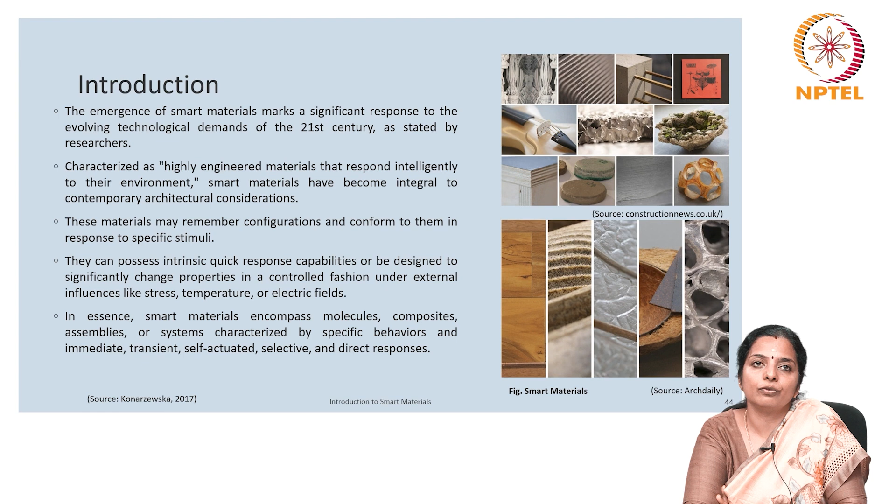In essence, smart materials encompass a diverse range of entities, including molecules, composites, assemblies, or systems, all characterized by specific behavior. These behaviors include immediate, transient, self-actuated, selective, and direct responses, making smart materials a versatile and dynamic class of materials.

Let us look at the characteristics of smart materials. Smart materials, in contrast to common architectural materials, exhibit distinct characteristics that set them apart. One key feature is their real-time responsiveness, enabling them to adapt dynamically to changing conditions. Unlike conventional materials, smart materials can react to multiple environmental states, showcasing their versatility. Importantly, intelligence is embedded within the material itself, allowing it to autonomously respond to stimuli.

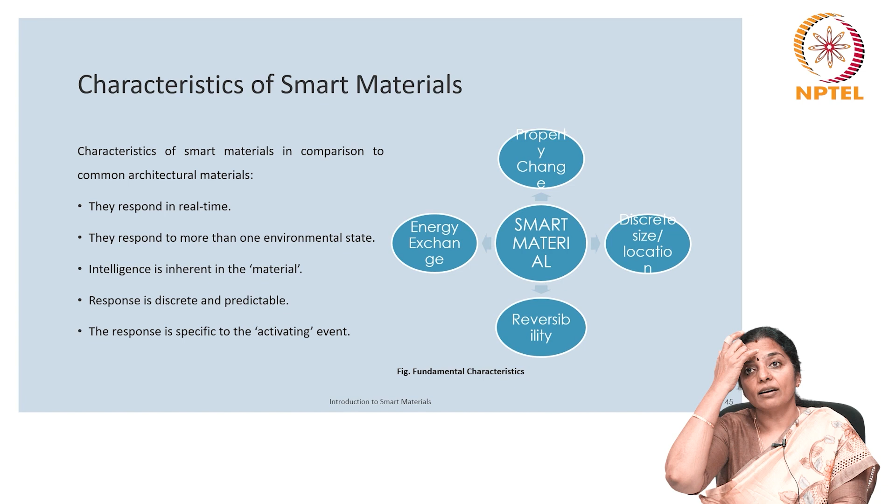The response of smart materials is both discrete and predictable, providing a controlled and reliable outcome. The specificity extends to the activating event, ensuring that the material's reaction is directly tied to the stimulus it receives. The fundamental characteristics that distinguish smart materials in architecture include their capability for property change, facilitating adaptability. They also possess the ability for energy exchange, contributing to their interactive nature.

Moreover, smart materials exhibit discrete size and location in their responses, allowing for targeted effects. Reversibility is another crucial trait, ensuring that the material can return to its original state after undergoing a change. These unique characteristics offer the potential for optimizing behavior to maintain steady state conditions in the environment, making smart materials valuable assets in architecture application.

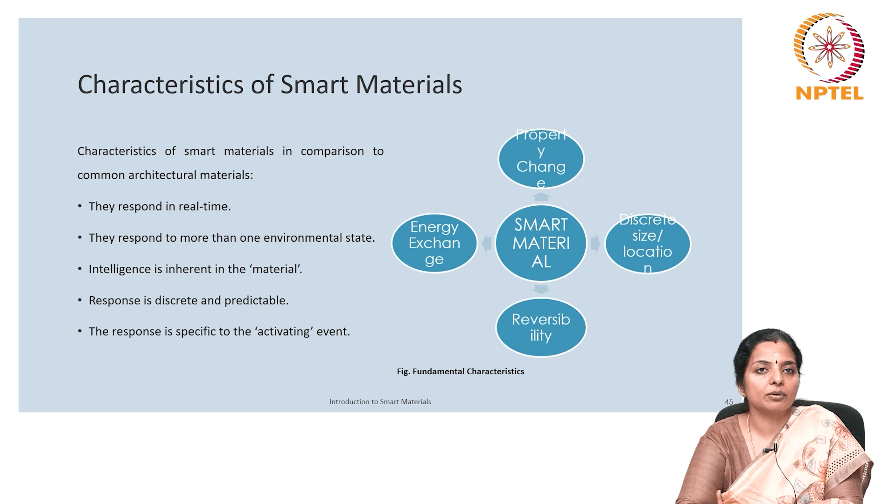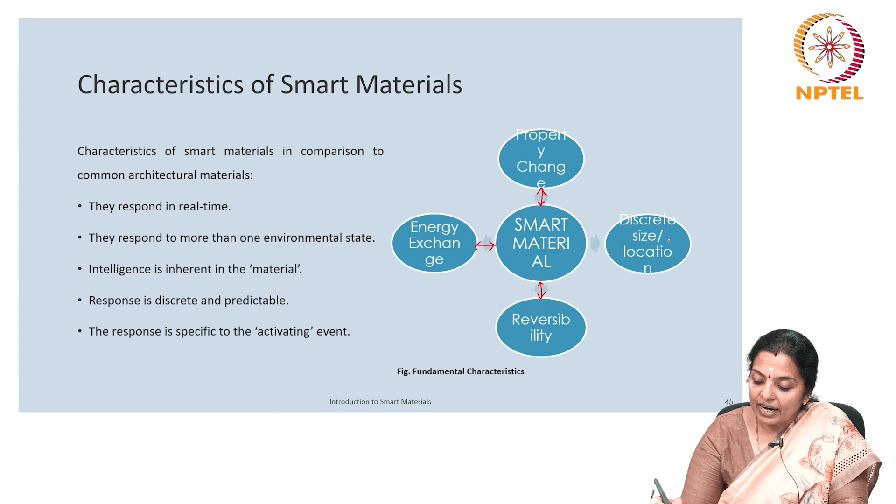In a gist, the characteristics of smart materials are that they respond in real time, they respond in more than one environmental state, their intelligence is inherent in the material, their response is discrete and predictable, and their response is specific to the activating event. Also, smart materials show reversibility, they show energy exchange, they undergo property change, and they have discrete size and location.

Let us look at the broad classification of smart materials. Now, smart materials are divided into two types, according to their behavior of energy stimulus from the surrounding environment. The first type comprises materials that have the capability to change their chemical, mechanical, electrical, magnetic or thermal properties, including thermochromic, phototropic, shape changing, mechanochromic, chemochromic, electrochromic, phase changing materials, and adhesion changing materials.

Now, the energy input to a material affects the internal energy of the material by altering the material's microstructure, and the input results in the property change of the material. Now, this type of material reacts through change in color and temperature.

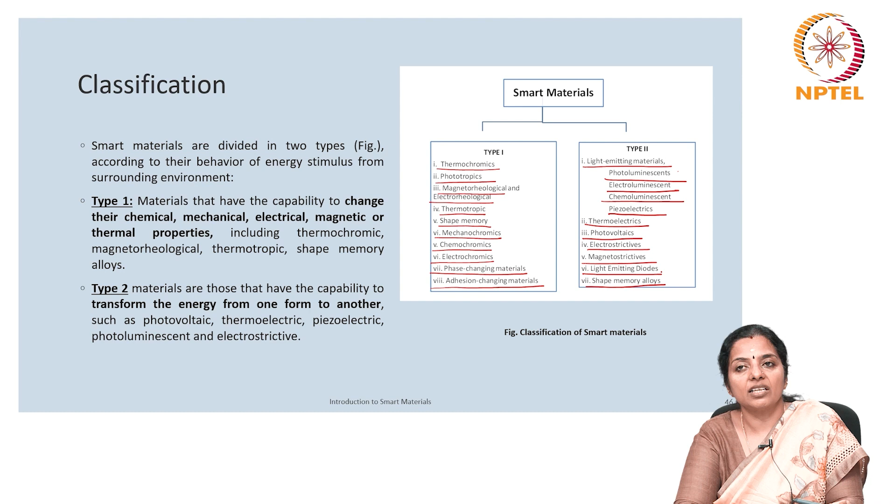The energy input to a material changes the energy state of the material composition but does not alter the material. While the state of the material remains the same, the internal energy undergoes a change. Some examples we have already seen. There are one or two which are common to both the types.

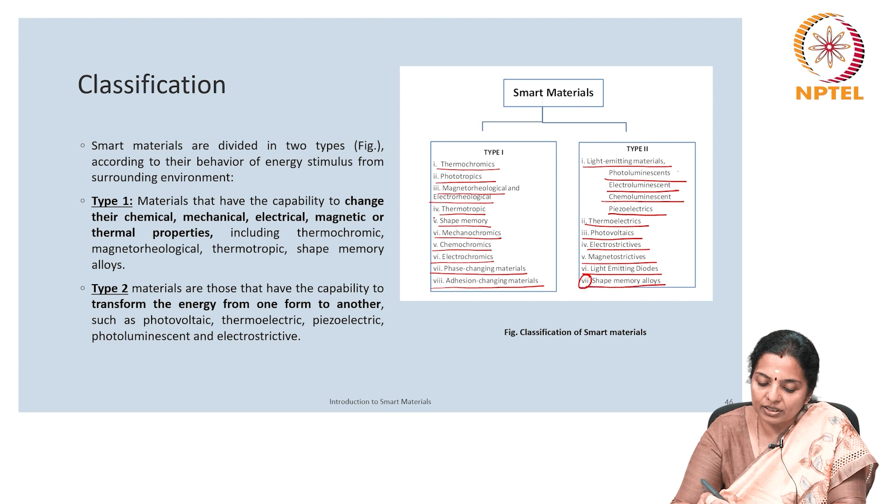Let us broadly look at the shape-changing smart materials. Shape-changing materials represent a remarkable class of substances that undergo reversible transformations in response to external stimuli encompassing light, pressure, heat, electricity, or magnetism. The alteration in their form is intricately linked to the distribution and arrangement of sensitive components within the material, ultimately resulting in changes in dimensions.

Ritter's classification system categorizes shape-changing smart materials into 6 distinct types, each responsive to specific stimuli. These are photostrictive, thermostrictive, piezoelectric, electroactive, magnetostrictive, and chemostrictive. Furthermore, subcategories within shape-changing materials are identified based on the specific alterations they exhibit, ranging from bending, striating, twisting and untwisting to constricting, loosening, swelling or shrinking.

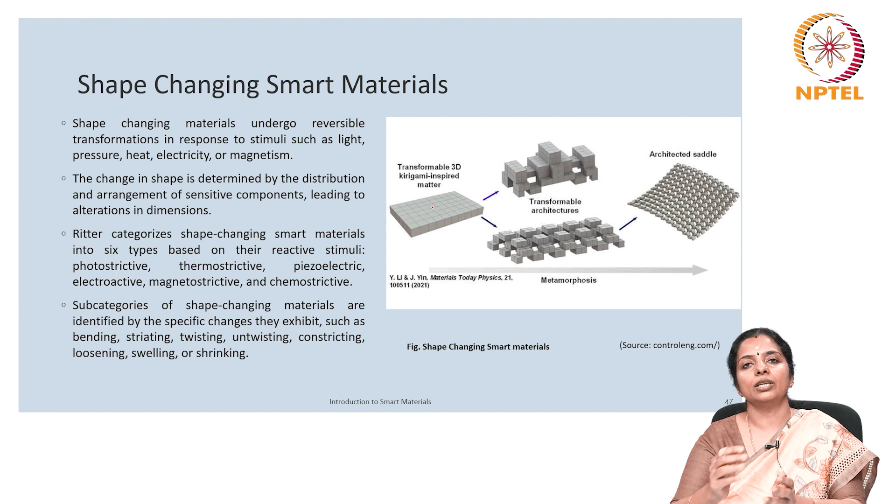This classification system not only facilitates a comprehensive understanding of the diverse behavior of shape-changing materials, but also provides a structural framework for their exploration and application across various fields.

Next, let's look at the energy generating smart material. Energy generating smart materials represent a remarkable advancement in the field of material science. These materials possess the capability to generate diverse forms of energy, usually achieved through the conversion of one energy type to another, culminating in the production of electric energy. The systematic examination of these materials employs two categories distinguishing them based on their inputs and outputs: energy exchange and electricity generation. The materials under scrutiny are intricate compositions combining various elements to fulfill specific functions.

These amalgamated materials can be likened to simple devices meticulously designed and structured based on their conceptualization and intended applications. This innovative approach to energy generation holds promise for more efficient and sustainable energy solutions, marking a significant stride in the realm of smart materials and their diverse applications.

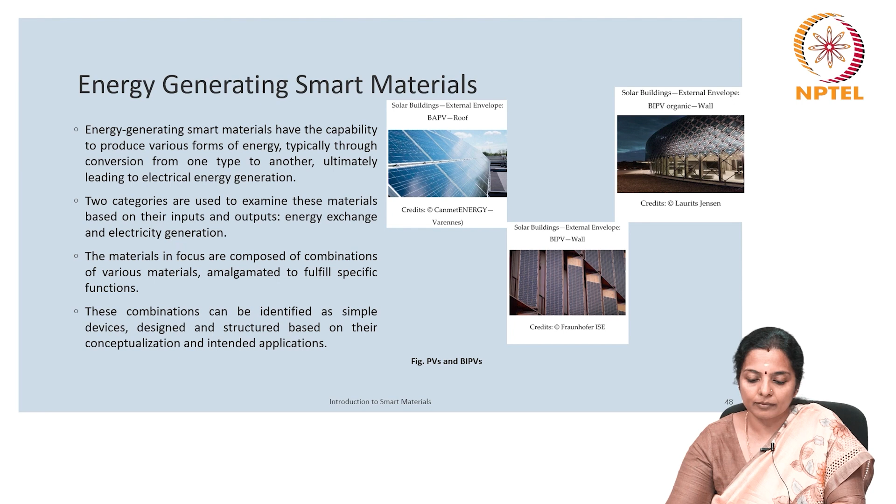Now, let us look at self-maintaining smart materials. Material science is a multifaceted domain that delves into both the exploration of smart materials and the experimentation with cutting edge technologies to augment the properties of existing materials. A notable recent development in this field is the advent of self healing technology, marking a substantial advancement. Unlike conventional material science approaches, certain emerging technologies within the realm focus on material research to fabricate entirely new materials endowed with distinct properties.

This approach diverges from naturally occurring smart materials that exhibit characteristics like self-maintenance. The property of self-healing inherent in smart materials is further amplified through these novel technologies, representing a significant stride toward more resilient and adaptable materials with enhanced capabilities in self-repair.

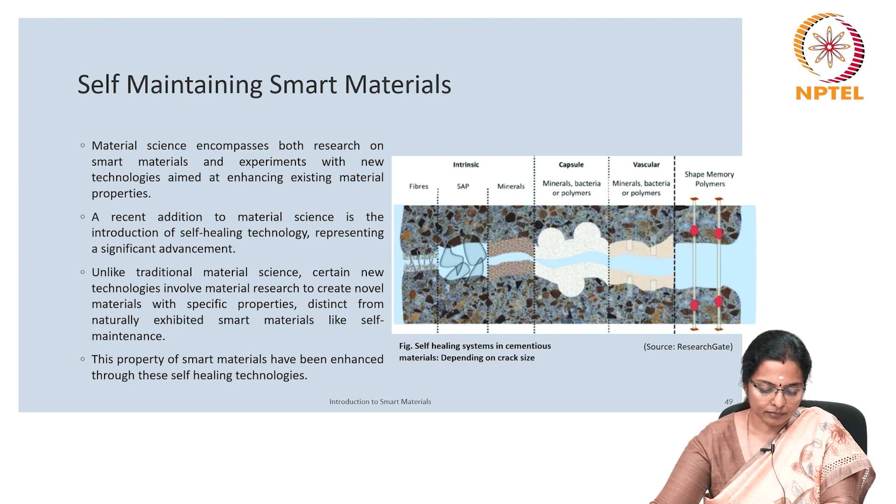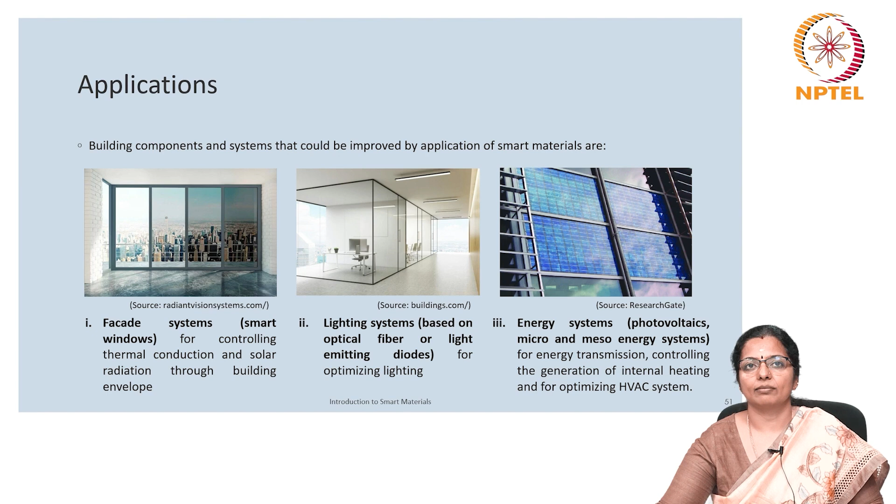Let us now look at the advantages of smart materials. Smart materials and their production processes have the potential to bring significant benefits to the construction industry. These materials offer improved strength, toughness, and ductility, making structures more robust. They also contribute to extended durability, reducing the need for frequent repairs or replacements. Smart materials are resistant to wear, corrosion, chemicals, and fatigue, ensuring a longer lifespan for constructed elements.

Importantly, they bring about cost savings not only during construction but also over the entire life of a structure. Additionally, these materials enhance a building's ability to withstand extreme events like natural disasters and fires, providing increased safety. Their manufacturing and application are straightforward, making the construction process more efficient. Smart materials also consider aesthetics and environmental compatibility, ensuring structures are both functional and visually pleasing.

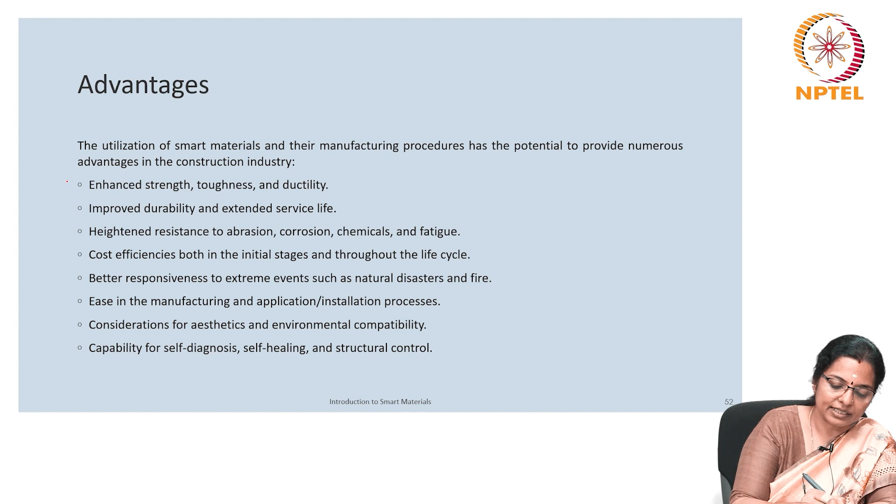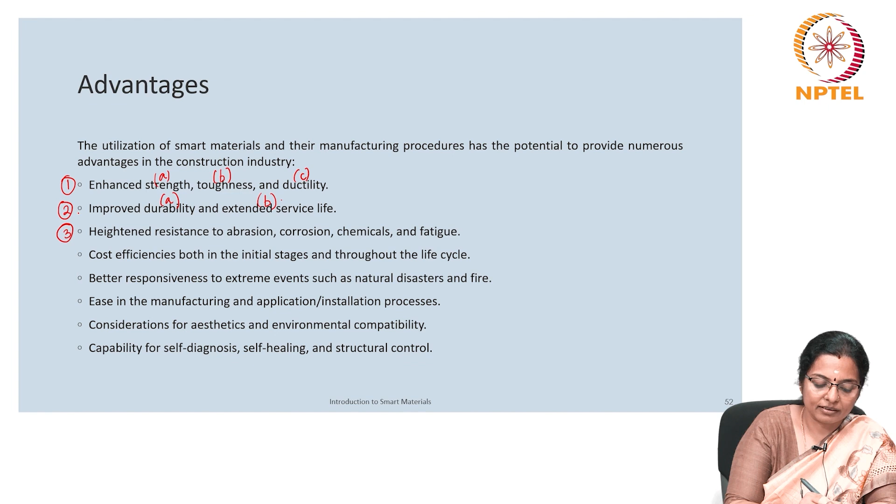They show improved durability and extended service life. Third, they show heightened resistance to abrasions, corrosion, chemicals, and fatigue. Fourth, they have cost efficiency both in the initial stages and throughout the building's life cycle. Fifth, they show better responsiveness to extreme events such as natural disasters, fires, earthquakes, cyclones, etc.

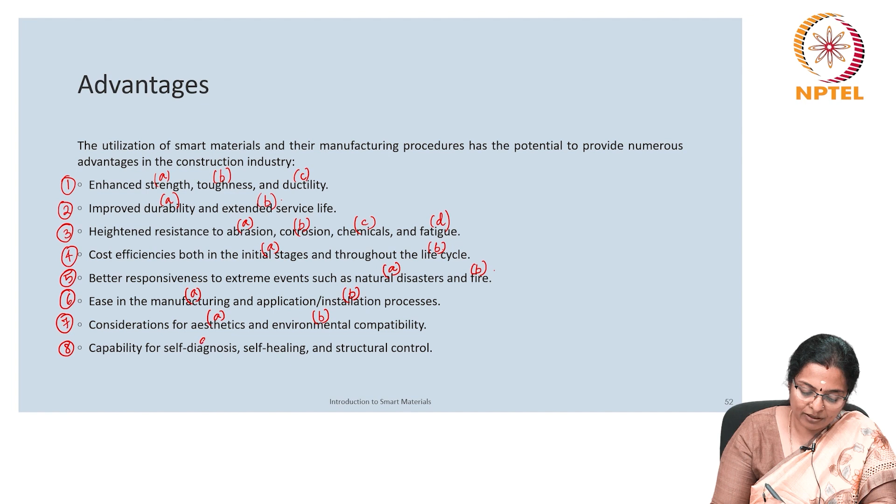Sixth, there is ease of manufacturing as well as installation. Seventh, the considerations for aesthetics and environmental compatibility are high. Eighth, they show capability for self-diagnosis, self-healing, and structural control.

What are the challenges of smart materials? Now, while smart materials hold the potential to effectively address environmental crises, their widespread utilization in building construction remains limited. This lack of prevalence can be attributed to factors in both theoretical and applied domains.

In the theoretical realm, the scarcity of knowledge and raw materials typically hinders the widespread adoption of new technologies. However, in the case of smart materials, diverse types are readily available, eliminating these theoretical obstacles. The impediments are thus rooted in the applied field, where concerns like the fear of risk, limited awareness, and high costs hinder their incorporation.

Overcoming these barriers requires proactive measures, starting with the introduction of smart materials through effective advertising to enhance public awareness. Subsequently, their implementation in prominent and visible locations becomes crucial for familiarizing people with these materials and encouraging their usage.

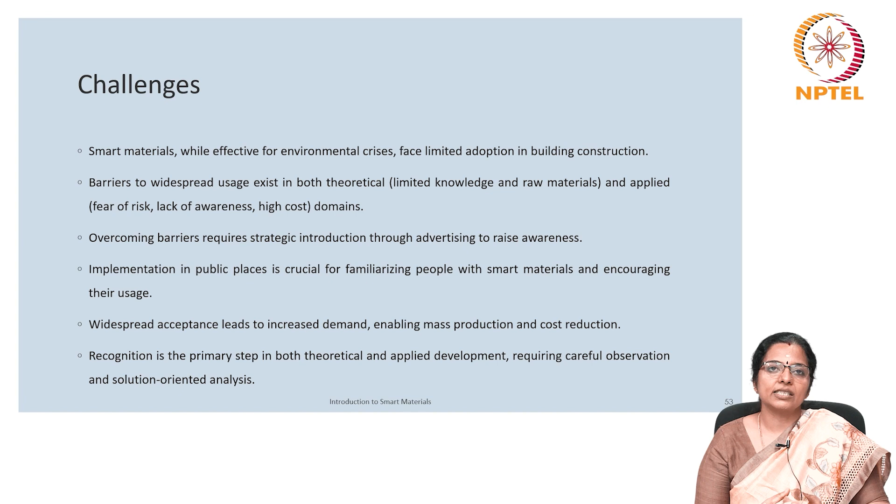In short, smart materials, while being very effective for environmental crises, have certain limitations in building construction. Barriers to widespread usage exist as theoretical, like limited knowledge and limited raw materials, and applied, which is fear of risk and lack of awareness, all of which come with a new material's usage.

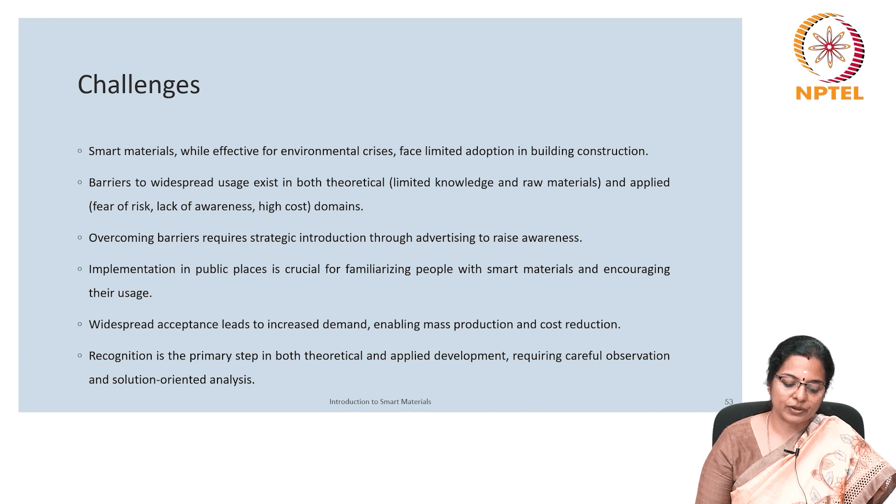Overcoming barriers requires strategic introduction through awareness, propaganda, advertising, etc. Implementing these in public places is crucial, as that itself serves as advertising for people and encourages use. Widespread acceptance leads to increased demand. This will enable production and cost reduction. Recognition is a primary step in both theoretical and applied development, requiring careful observation and solution-oriented analysis.

We will now look at a few building examples. This is the Dutch Biotope Pavilion, spanning an area of about 3,727 square meters and situated in Dubai. It stands as an innovative architectural endeavor by V8 Architects. This project goes beyond its physical dimensions, serving as a response to pressing global challenges such as water scarcity, energy transition, and food shortage. At its core is a distinctive chimney-like structure forming a cone within the pavilion.

This element plays a pivotal role in the exhibit, effectively regulating temperature and moisture levels, addressing the critical issue of water scarcity. The pavilion implements a sustainable solution by harvesting 800 liters of water every day from the humidity of the air, subsequently utilized for plant irrigation. Impressively, the entire process is powered by renewable energy with lightweight, organic, transparent solar cells integrated into the design, showcasing the artistic touch of Marjan van Aubel.

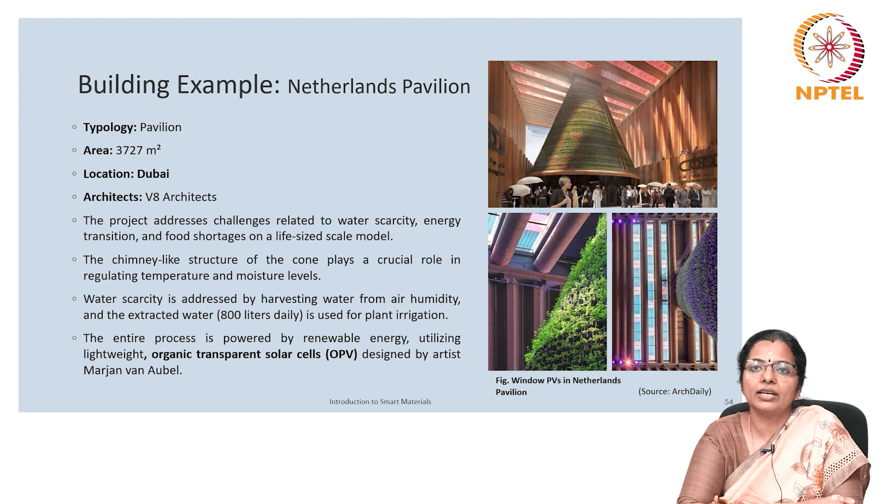The next building example is one situated in Yakushima, Japan. This is a hospitality project covering an area of 162 square meters. It showcases the innovative design expertise of architect Tsukasa Ono. The focal point of the design involves incorporating burned wood beneath the foundations of each building, facilitating mycelium growth in the forest's soil network.

Mycelium, recognized as an eco-smart material, plays a crucial role in fostering tree root growth under the structures. This contributes significantly to soil strengthening. As part of its commitment to sustainability, the project embraces a regenerative architecture methodology developed by Sumu. This approach seeks to enrich nature through thoughtful building interventions.

Additionally, the architectural features in the project prioritize self-sufficiency, achieving 100% off-grid energy utilization through a combination of solar power, storage batteries, and locally sourced firewood. This harmonious blend of ecological considerations and architectural innovation defines the unique character of the hospitality venture in Yakushima.

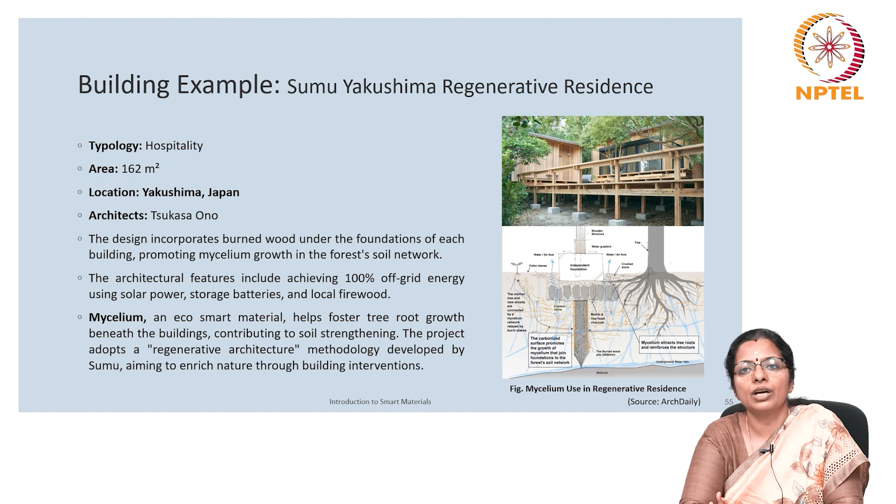In summary, smart materials engineered for intelligent responses to environmental stimuli are reshaping the landscape of architecture by providing adaptability and enhanced functionality. These materials find application in various components such as facades, lighting, and energy systems, capitalizing on their versatile and responsive properties. With traits that are changeable and reversible, smart materials contribute significantly to sustainable construction practices.

The integration of these materials is exemplified in innovative projects like pavilions and hospitality structures, showcasing their practical applications in addressing contemporary challenges. Notably, shape-changing and piezoelectric materials offer adaptability to external stimuli, introducing new dimensions of versatility. Regenerative architecture takes the concept further by integrating burned wood and mycelium, promoting self-sufficiency and comfort.

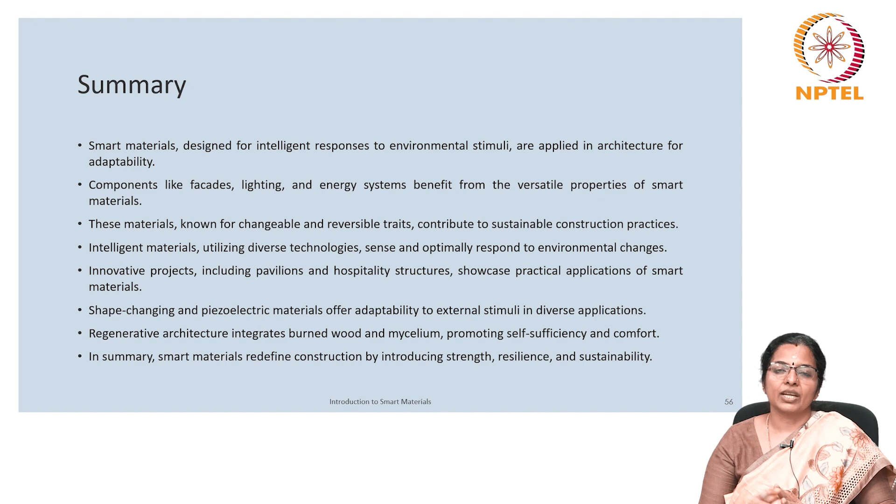In conclusion, the adoption of smart materials signifies a transformative shift in construction practices, introducing strength, resilience, and sustainability across diverse applications, paving the way for a more adaptive and efficient built environment. With this, we will conclude the introduction of smart materials in architecture. In the forthcoming classes, we will see every smart material one by one in detail.